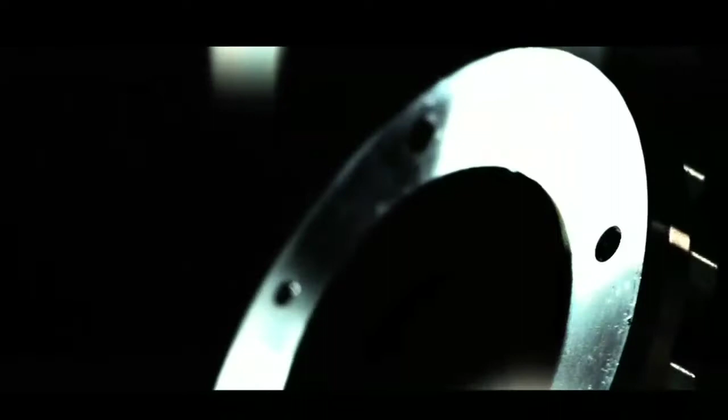This impulse, nurtured incessantly since the company's inception in 1958, led Faital to explore new frontiers in technology and innovation. 2005 saw the birth of the Faital Pro brand and the beginning of a new era of products and company strategies aimed at affirming the brand at an international level in the field of high-end components for professional audio.

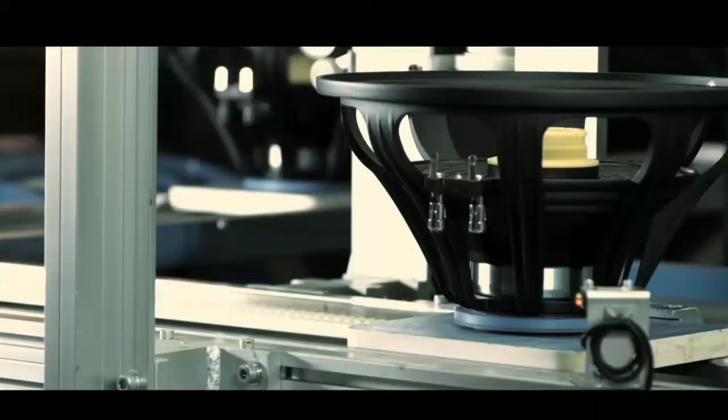Notwithstanding the Pro Audio division's recent foundation, the technology, industrialization level, production processes and service quality stem from the know-how accumulated by Faital over half a century operating in the loudspeaker industry. We are talking about a company present throughout the world that capitalizes on its geographical locations in order to be closer to its customers and offer them an ever more competitive service.

Starting in Italy, with the company's headquarters, the R&D center, and a manufacturing facility entrusted with the Pro Audio division's entire production. There then followed the logistical and commercial subsidiaries in the USA, Mexico, and Hong Kong, together with 2 more manufacturing sites in Spain and Hungary.

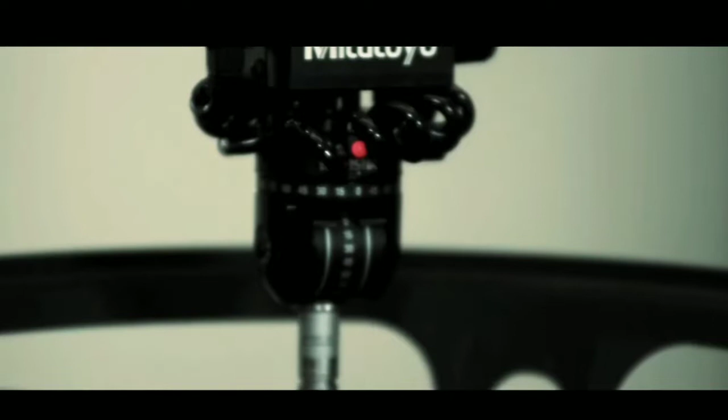Another major strong point of the Pro Audio division concerns product customization. Thanks to the company's interaction with more industrialized markets, Faital Pro employs highly advanced machinery and technology. This peculiarity, linked to the technology and a remarkable design capability, results in products that meet customer requirements perfectly.

From the initial design stage onwards, stringent checks are carried out that eliminate the risk of arriving at the production phase with unsatisfactory designs. This means fully understanding and meeting customer requirements and the capacity to translate these into a manufacturing project in the shortest time possible.

Faital Pro products are the fruit of design that is without equal in the sector. After a feasibility study and having established the performance requested from the product, work continues through the use of design and modeling software.

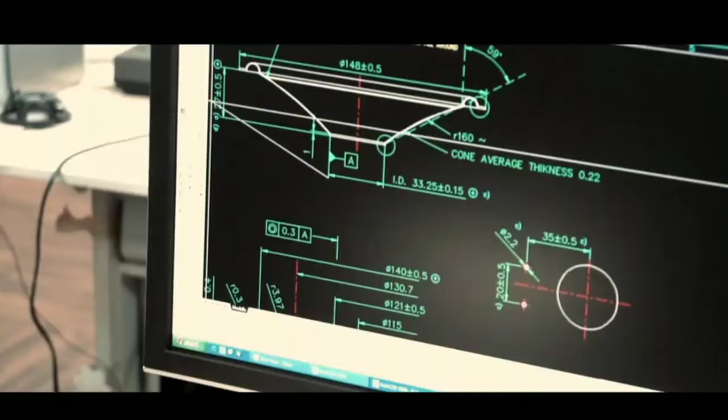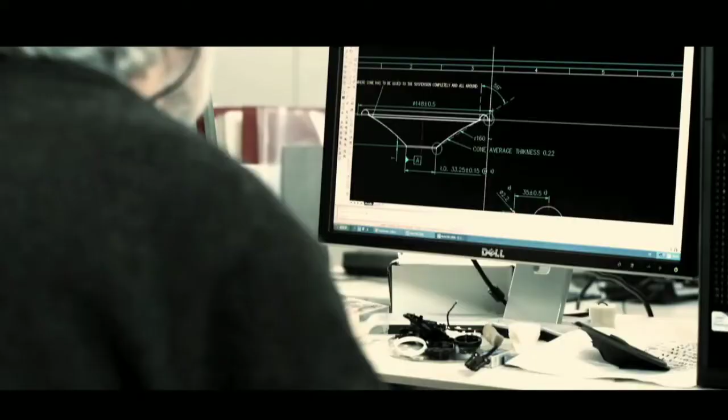These programs are employed to design the individual components and the finished speakers, to then proceed with the simulation of a virtual assembly. The know-how of the department assigned to professional audio comes from the enormous investment that Faital has been making in research and development since its establishment.

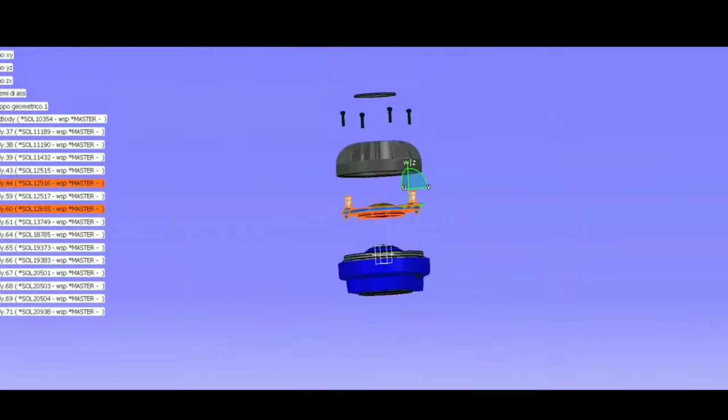Furthermore, should there be specific requests from OEM customers, Faital Pro is able to work on 3 different CAD systems: AutoCAD, CATIA and NX. This assortment of software and the 8 workstations currently employed put the company in the best possible conditions to interact with the customer, facilitating the exchange of mathematical data and drawings.

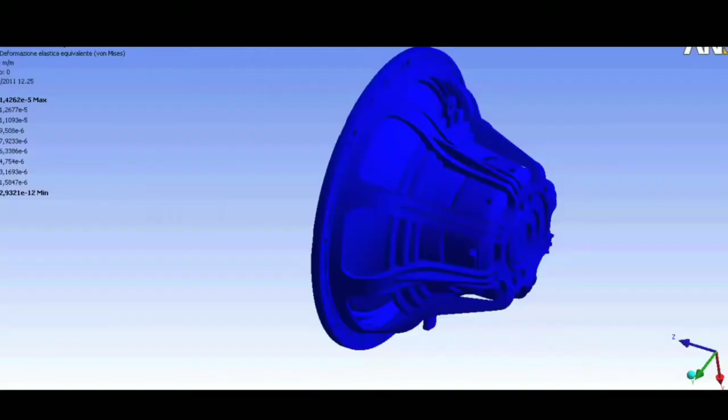Subsequently, to understand every aspect of each product's performance and guarantee a flawless start of production, every speaker and component design is put through an engineering simulation software capable of carrying out a finite element analysis, also known as FEA. This software is able to perfectly and realistically recreate all the environmental conditions of final application to which the speaker may be subjected.

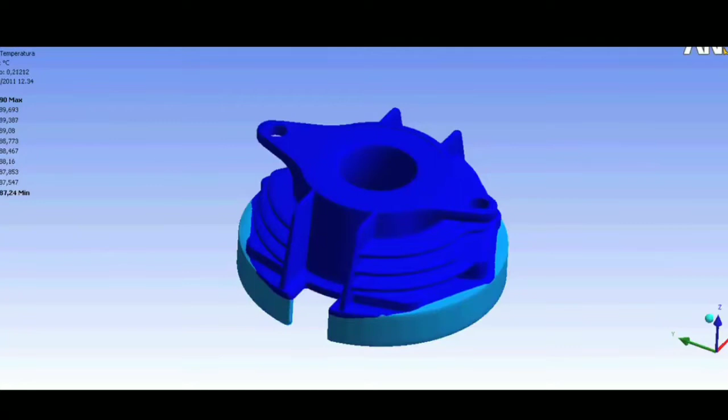The situations reproduced, which vary from climatic to mechanical and use conditions, are then brought to extremes in the simulation in order to evaluate the piece by subjecting it to exceptional stress.

An advanced feedback process using equipment such as laser vibrometry scanners to thoroughly evaluate the static and dynamic aspects of parts and assemblies allows the enhancement of the simulation database, which in turn makes the predictive analysis ever more reliable.

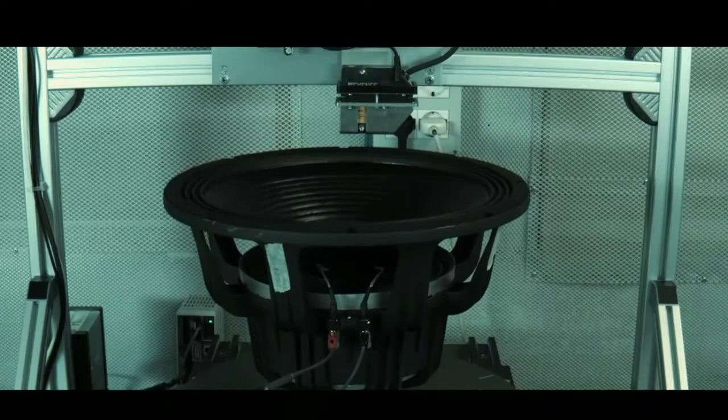To have complete control over the final product, Faital monitors every slightest detail that concerns it. Having a perfect knowledge of the processes and methods employed in the manufacturing of its components, the company is able to give precise indications to its suppliers on how to produce the requested parts.

Keeping to this philosophy, a dedicated department has been entrusted with certifying the purchased components' conformity through a series of specific tests and measurements.

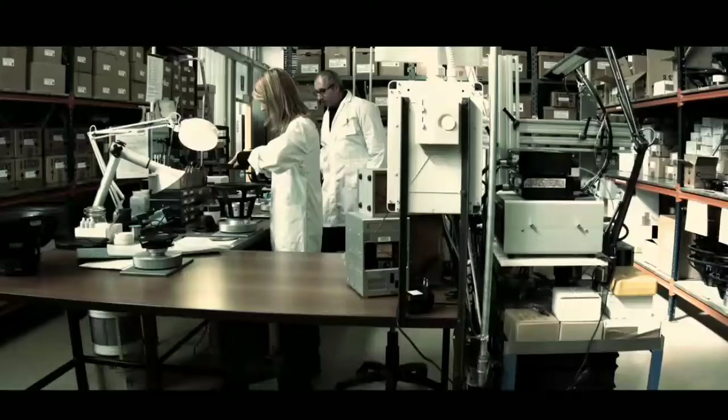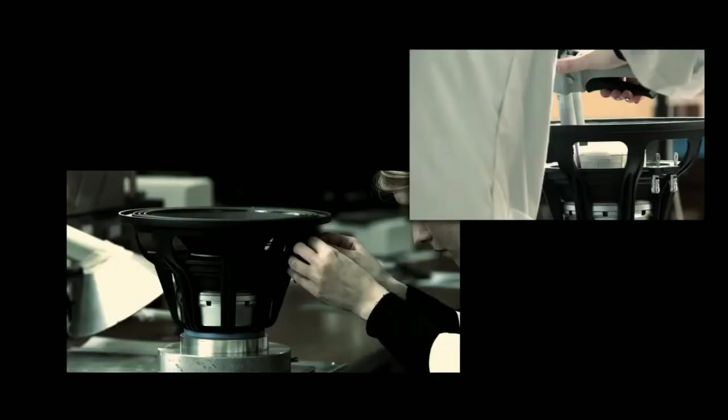Product study continues. This is the moment for measurement on real products. At this point, by means of rapid prototyping techniques, a sample speaker is produced. In fact, notwithstanding the simulations carried out being the best possible, some situations cannot be predicted at a virtual level.

For prototype study, Faital uses a third-generation DFMEA control method. The design failure mode effects analysis serves to analyze the failure, defect mode, and frequency probability in order to detect possible weak points in the design and rectify them.

The prototypes are put through a measurement process defined and controlled by Faital's R&D department, resulting from extensive experience accumulated also from collaboration with customers in a variety of sectors. This process, completely carried out in-house, serves to evaluate the speaker's total performance, and goes from acoustic measurements carried out in two anechoic chambers to laser-based assessments, such as those relative to linear parameters, performance with large signals, and the analysis of geometry and behavior of the speaker's moving parts.

Following is the validation phase, carried out on the components, prototypes, and final products, a test that accelerates and amplifies possible environmental conditions of the final application. These parts are subjected to numerous variables, among which dry corrosion test, thermal shock, life test, UV rays, and vibration and shock testing. This final process guarantees that the quality Faital Pro attributes to every product remains unaltered as long as possible.

The validation is divided into two stages. The first takes place at the design level and is carried out on the components and prototypes of the final product, while the second is completed after the loudspeaker has been industrialized and put through a pre-series production.

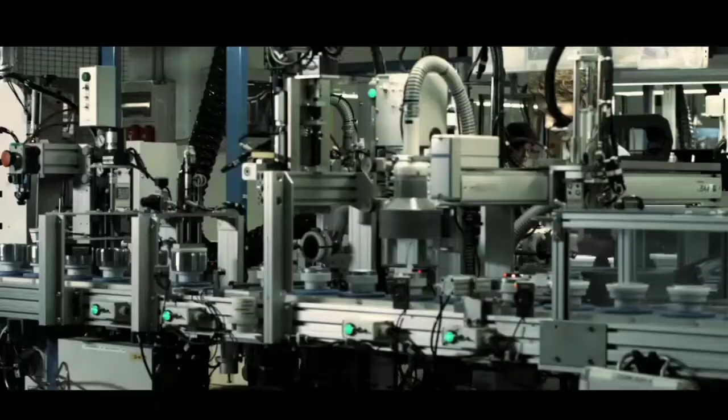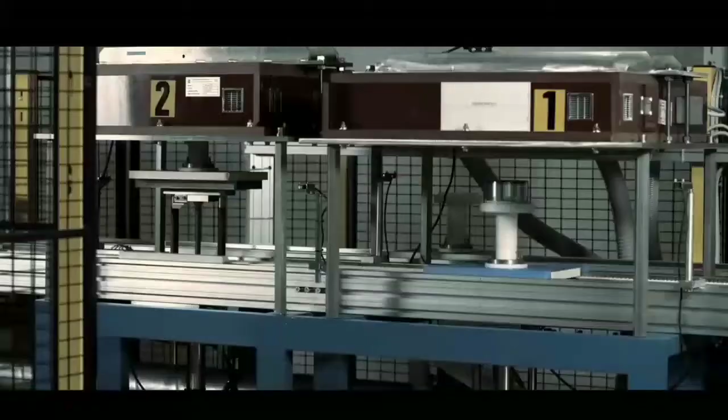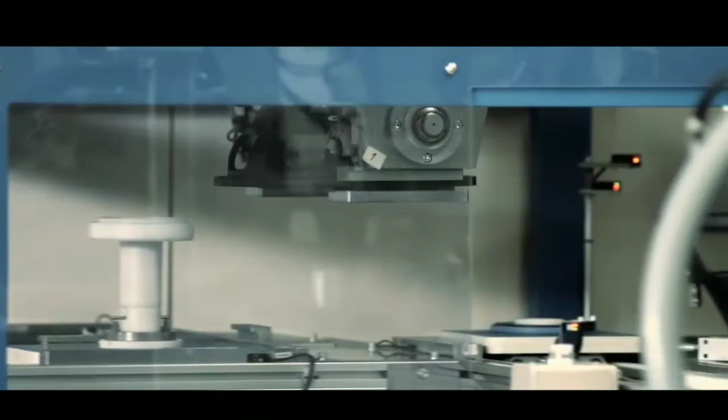As previously mentioned, the Pro Audio division has at its disposal production processes, technologies, and machinery that have no equal in the industry. The advantages to customers are obvious. In fact, the high level of automation assures that the manufacturing process supplies results that are numerically significant and uniform over time, as well as constant product availability in any quantity and a high flexibility of production over an extensive range of models.

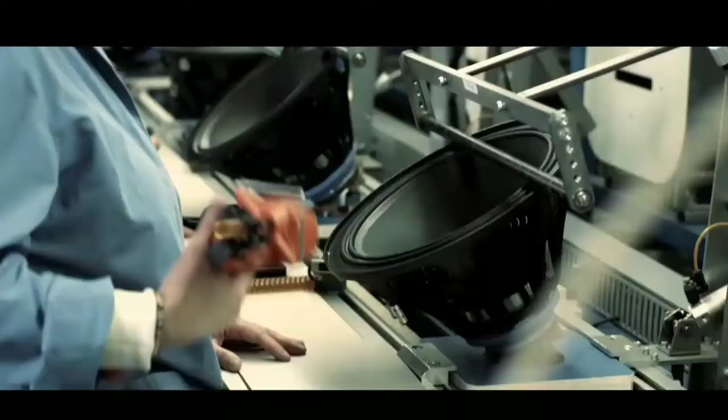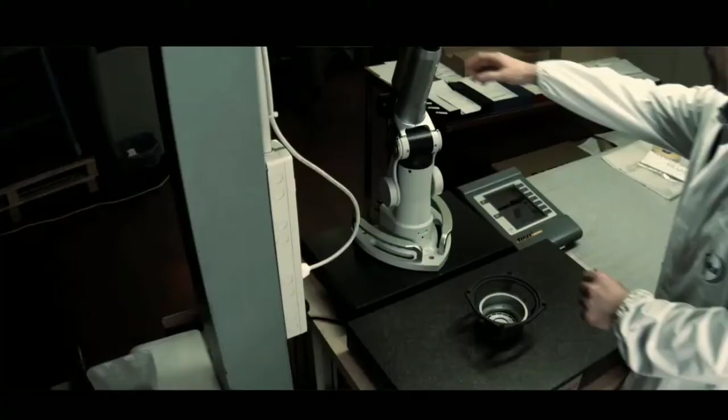Furthermore, the processes just described are verified and optimized by means of constant quality control along the whole line. To oversee this verification, Faital has established a General Management Committee charged with guaranteeing the uniformity of manufacturing methods in every production plant worldwide. Careful controls are carried out on components coming from external suppliers by an incoming inspection department using equipment similar to that of the R&D department.

In addition, the final products are individually tested at the end of the line using special automated systems capable of verifying 7 main electroacoustic parameters relative to the nominal conditions of use and that determine the performance of every product.

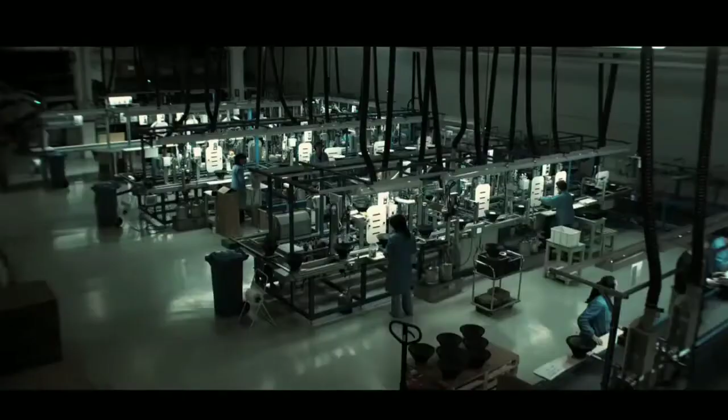The first thing that an audio system must convey is emotion. Research, technology, and quality are the means, but the objective is complete customer satisfaction. This is the philosophy that has led first Faital and then the Pro Audio division in every one of its projects, from the smallest to the most ambitious.

Sound is beauty and ferment, vibrations moving through the air, taking completely the mind. Amplifying these emotions for Faital Pro is a commitment which goes far beyond its profession. It's an inborn passion, the privilege of working in an environment that is art, genius, and excitement, and which is corresponded by Faital Pro with precisely the same enthusiasm, respect, and admiration.